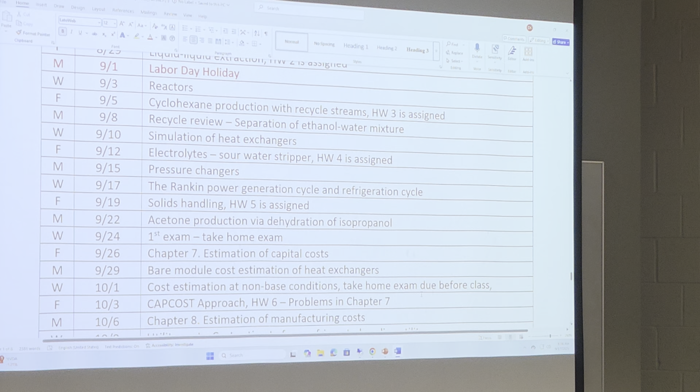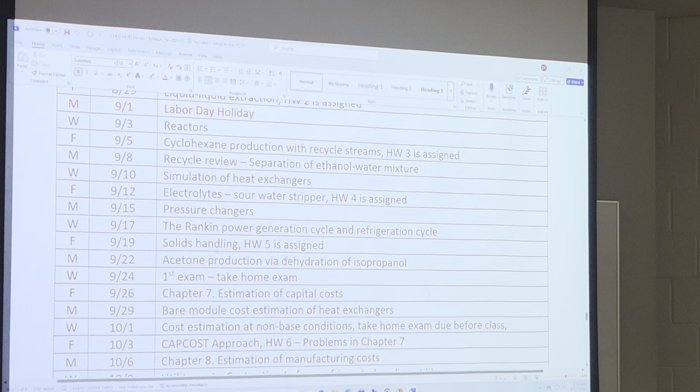Any questions? No? Let's look at our syllabus schedule. Tentative lecture schedule. September 17th, we talk about Rankine power generation cycle and refrigeration cycle. And then Friday, solids handling. And homework 5 is assigned for Friday. I'll give you some updates on homework.

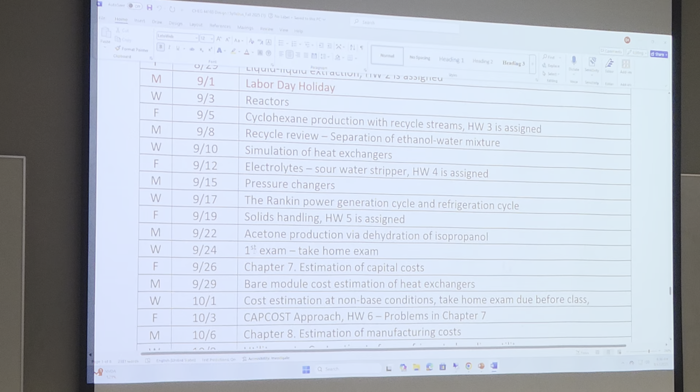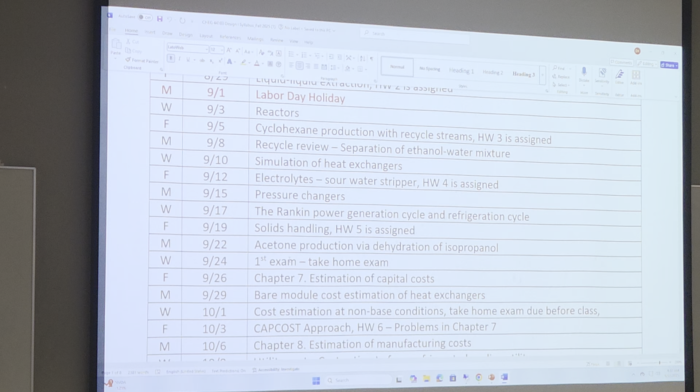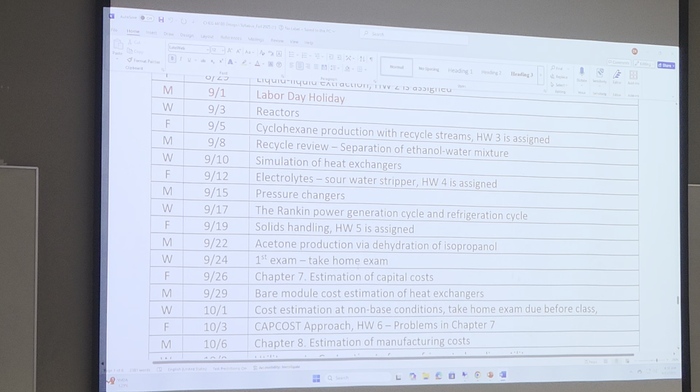Why? You can see our first exam starts next Wednesday. Yes, 1 week from today. Exciting. Very interesting homework recently, but it's time consuming, very time intensive. As you can see, you will be given a 1 week take-home exam. So it starts from next Wednesday, you will be given 1 week to submit. Yes, there will be 7 questions.

But how nice I am. I will show you 1 exam question next Monday. So next Monday, what I show you is exactly that 1 exam question. You know how nice that is, huh? So what do you think? It means you better finish the homework earlier, before that Monday lecture time. Even though homework is already available, Friday I'll give you more information about the homework. Just finish it during that weekend, and then next Monday when I show you 1 exam question, you can finish that 1 question.

But the official exam starts next Wednesday. Only 1 rule for that take-home exam: you cannot discuss with anyone, each other, including me. You can ask me general questions, but not technical questions. You do all by yourself. Is it clear? Don't talk to anyone, don't discuss anything about Aspen, about this class. Do all by yourself, as much as you can, and submit it through Blackboard, same as homework. We'll talk about details next Wednesday, but that's our scheduling.

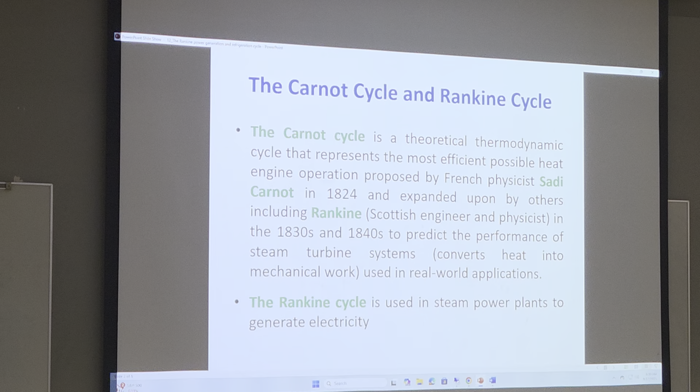Let's talk about Rankine power generation cycle and the refrigeration cycle. You have heard about the Carnot cycle, yes? What is the Carnot cycle? There's no change in entropy in it. It's a reversible cycle, isn't it? It's the most efficient, no energy loss. Okay, good. What else? Most efficient heat cycle, steam engine. Yeah, kind of. Most efficient steam engine cycle.

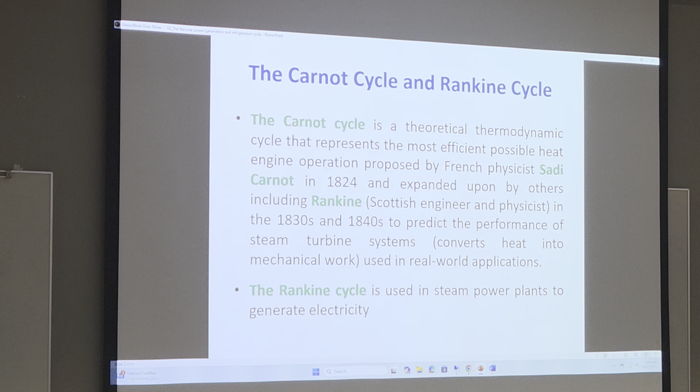From this Carnot cycle, simply the industrial revolution started. Steam engines for train transportation; we developed coal-fired and natural gas-fired power plants, all based on the Carnot cycle. Carnot is a person's name, a French engineer and physicist, Sadi Carnot. In 1824, he proposed and published that idea. But in the 1830s and 1840s, the Scottish engineer and physicist William Rankine expanded Carnot's idea to complete the power generation cycle. So we call it the Rankine cycle.

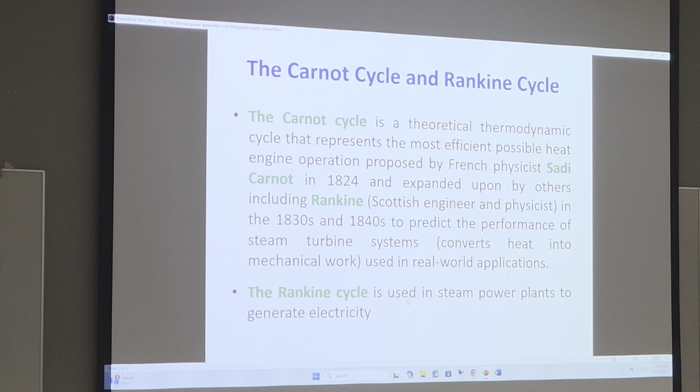So who should get more credit for this idea? In my opinion, Carnot should get more credit, since whoever invented it first should get more credit, but Rankine expanded and completed that theory. This theory predicts the performance of a steam turbine system, converting heat into mechanical work, to generate electricity or run our steam engine. The Rankine cycle is used in steam power plants to generate electricity. Carnot cycle, Rankine cycle. Amazing topic.

If you look at this Rankine power generation cycle, we have pump, boiler, turbine, condenser. It's a closed system, not open. As long as we input some water, in this case 10,000 kilograms per hour, this water will continuously circulate in this closed system and generate electricity. Somebody says we don't lose anything. Yes. Somebody says it's a very efficient power generation cycle. Yes.

Next slide, amazing. Exactly the same concept, and engineers developed this idea for the refrigeration cycle. We use compressor, condenser, valve, evaporator. It's also a closed system. We just replace water with a refrigerant, ammonia in this case, or propane gas, like used in forklifts. Nowadays, hydrocarbons, CO2, dimethyl ether, CFC, HCFC refrigerants. Only replacing water with refrigerant, we can develop a refrigeration cycle.

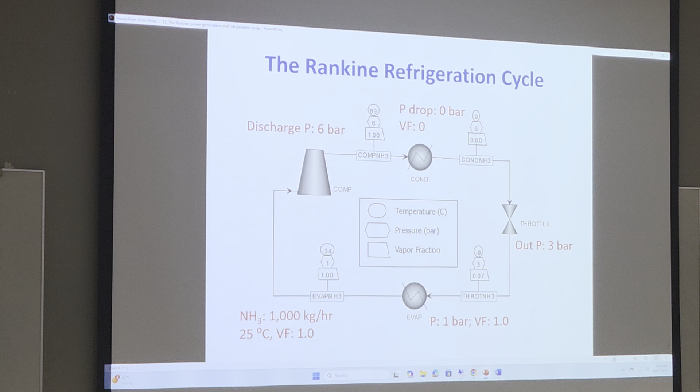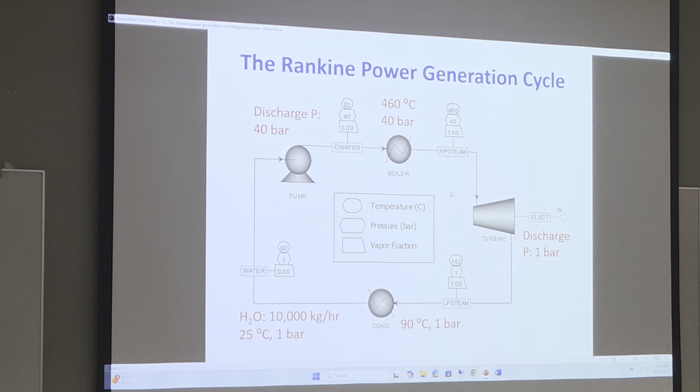Imagine how much the Rankine or Carnot cycle and refrigeration cycle contributed to our daily life. Think about your refrigerator; how could you survive nowadays? A huge contribution to human daily life. As I mentioned, from the Carnot and Rankine cycles, the industrial revolution started and bloomed. Anyway, let's design the Rankine power generation cycle first, using Aspen.

For water, if you go to the method assistant, it recommends using a steam table. So I can choose IAPWS-95, International Association for the Properties of Water and Steam. That's the most recent steam table. We have only one component, so don't worry about binary interaction parameters. We will have a warning that says binary parameters are missing. We only use one component, so it's okay.

As you know, we have one pump, and we have a boiler and condenser, and then we have a turbine. Turbine is under pressure changers. Let me rotate this icon so that I can connect streams well. So let's try to connect streams.

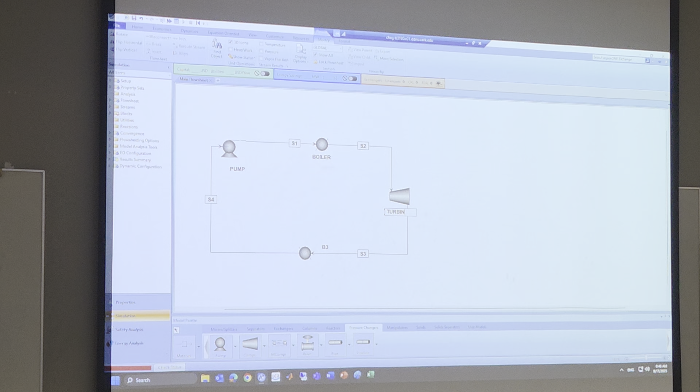Okay, let's name it. This one is pump. This one boiler. This one turbine. The turbine is for what? To generate electricity. So I will connect a work stream to generate electricity. So we generate electricity.

Let's name this stream cold water. This one high pressure steam, low pressure steam, and this one just water. Okay? Let's input our initial water flow. So you go here, 25 degrees Celsius, 1 bar, and then water mass flow is given. So I will put water 10,000 kilograms per hour.

We are working on the boiler. If you look at the slide, boiler temperature 460, pressure 40 bar. It's all given, so we'll put it in. I am working on the condenser, 90 degrees Celsius, 1 bar. Let's go. We are working on the pump. Discharge pressure is given, 40 bar. Efficiency is not given, just leave it.

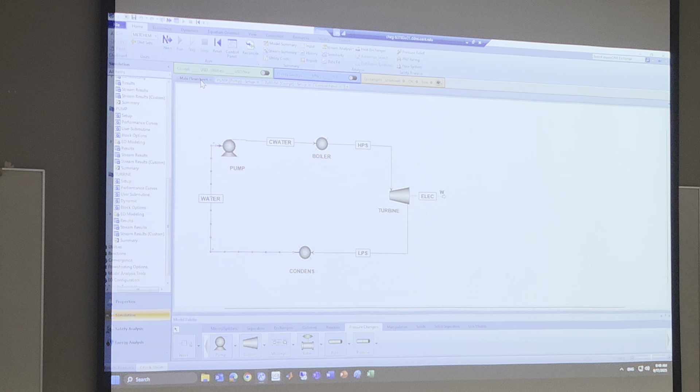Okay. So our simulation is done. Let's look at temperature, pressure, vapor fraction. So we will pay attention here. Initial water was about 90 degrees Celsius, 1 bar, and the vapor fraction is 0 because water is liquid. We pumped to 40 bar, high pressure, and we produce high pressure steam using the boiler. At that time, the temperature is 460, 40 bar. We produced high pressure steam, so vapor fraction is equal to 1.

We use this high pressure steam to generate electricity through the turbine. So let's look at how much electricity is generated. How much electricity? What do you see? Ryan, can you see? Negative 1,630 kilowatts. So what does negative mean there?

Leaving? In this case, leaving is not a good word to express this one. Being used? I don't think so. Paige was smiling. I was just laughing. Oh, Harrison. What does negative mean in this case? Jackson, can you help me? Is it the maximum?

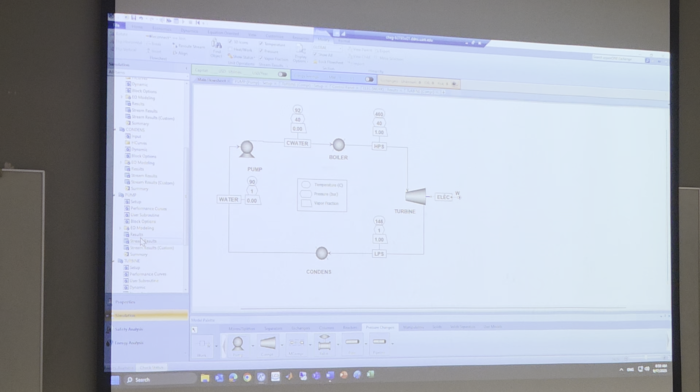But anyway, what are we talking about here? We used 10,000 kilograms per hour of water. We can generate about 1,630 kilowatt of electricity, more than one or two residential houses. Now, if you look at here, we used a pump. So let's look at how much energy is required for the pump and boiler. After you run the simulation, you can check how much power is required for the pump. It's about 26 kilowatt to pump 10,000 kilogram per hour of water.

Now we can check the boiler, how much heat is required. As you can see, heat is given in gigajoule per hour. About 30 gigajoule per hour of heat is required in that boiler. Boiler means we use steam or burn natural gas to boil the water to produce high pressure steam. Now check the condenser. In this case there is a negative value for heat; the heat is extracted from the condenser. It's about 24 gigajoule per hour of heat extracted.

You get some idea now what's going on? Now, the question here. Look at the cycle. We pump water. We boil that water, produce high pressure steam, generate electricity. We still have low pressure steam. But we condense it to water and pump, boil again, produce electricity, and condense water again. Pump, boil, produce electricity, and condense water again.

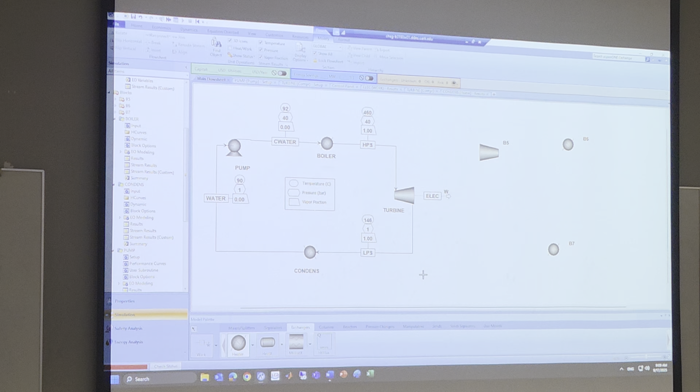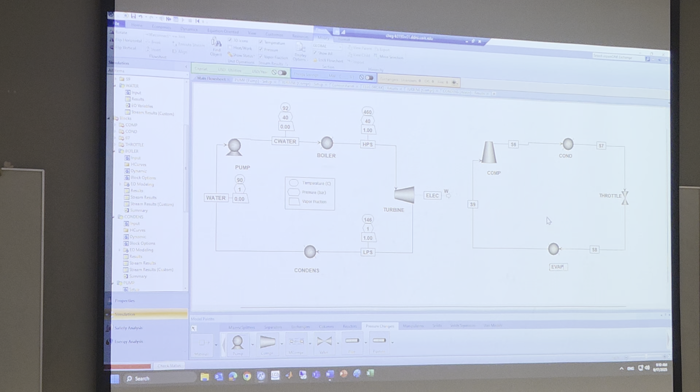So in this case, we have a compressor, and we have a condenser, evaporator, and a throttling valve. So I will choose this one. Let's rotate the icon. Let's connect material flow. In this case, compressor. Condenser. Valve and evaporator. We use ammonia, so I will name it compressed ammonia, condensed ammonia, throttle ammonia.

We use ammonia, so we need to specify a component, ammonia. So let's go back to the property window. I will put ammonia. And we don't know what property method to use. So let's go for now. Run the simulation. Now, if I run this simulation, what do you expect? We didn't put any information yet, so let's go to the compressor.

Okay, isentropic, discharge 6 bar. Let's continue. I am working on the condenser. This information is all given: pressure drop is given, and the vapor fraction is given. So the vapor fraction is equal to 0, pressure drop is equal to 0. Let's continue. I am working on the evaporator. Pressure is given, 1 bar, and vapor fraction is given. So I will choose vapor fraction is 1. And let's continue. Throttle outlet pressure is 3 bar.

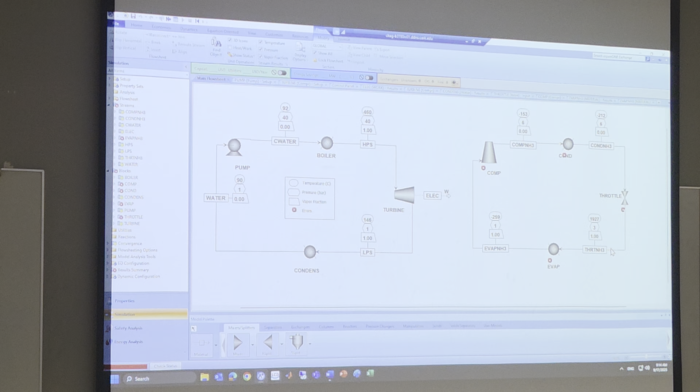Select that flow sheet, right click on any unit block, and you can change the section and define a new section. I define S1. Select your second flow sheet, right click on any unit block, and for change section, create new section S2. So we have 2 different sections. We can specify 2 different property methods. For this one, maybe steam table. For this one, an equation of state-based property method. But how do we do it?

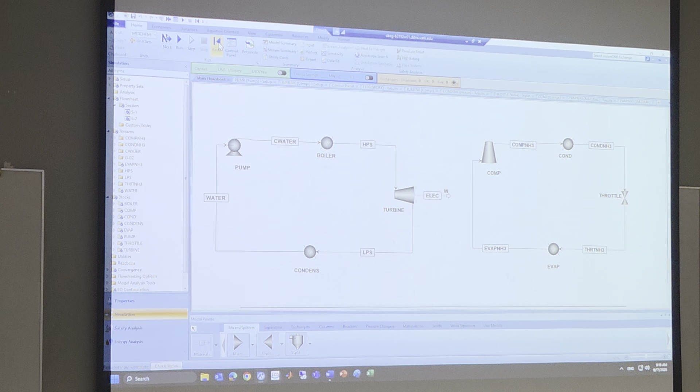If you go to the property window, under the methods folder, then the flow sheet section tab, you can choose S1, steam table, and S2, what the method assistant recommends, refrigerant property, so the REFPROP property method. Okay? And for this simulation, let me just reset just in case, to reinitiate the calculation. Now we can run 2 different processes in one main flow sheet. We are not using global anymore, so right click and you can delete global. So we got no warning, no error.

Okay. Now what we are interested in, if you look here, this is the refrigeration cycle. So please look at the temperature profile in this case. Right now, after the throttle valve, the temperature is 9 degrees Celsius. And after the evaporator, the temperature is negative 34 degrees Celsius. By using 1,000 kilograms per hour of ammonia, very similar to the power generation cycle, we could produce this refrigeration cycle.

The amazing thing here, if you look at your home refrigerator, how do we control the temperature? If you just change that pressure, let's say initially 3 bar, change it to 5 bar, we can easily control the refrigerator temperature. What do you see now? 4 degrees Celsius. Yes, it's about 39 degrees Fahrenheit. Your refrigerator temperature. You can easily change that pressure and control the output temperature of the refrigeration cycle. Initially it was negative 34, now it's negative 19. Your freezer temperature.

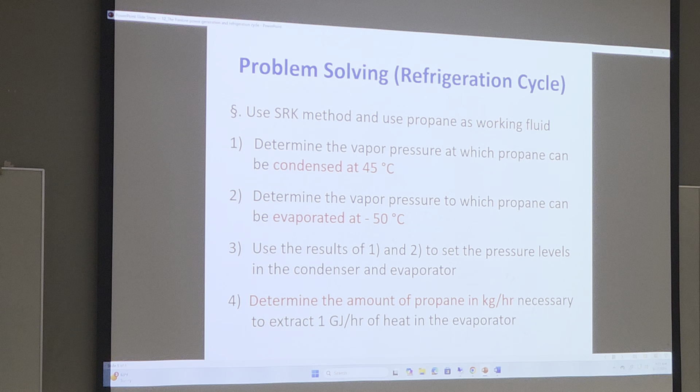You got the idea of those questions? Yes? Let's try to solve the first question. It says, determine the vapor pressure. What do we use? In this case, we use propane. So let's define propane. Okay, and it says to use the SRK method, so we use the SRK method. Now the first question was determine the vapor pressure at which propane can be condensed at 45 degrees Celsius. What does that mean? You can use this analysis. It's called property. Vapor pressure. If you hover your mouse on PL, vapor pressure for pure component. Unit, maybe we can choose bar.

Determine the vapor pressure of propane at 45 degrees Celsius, which can be condensed at that temperature. So I choose 45 degrees Celsius. We are working on propane. We use the SRK method, run the analysis. Then check. We get 15.5011 bar. At that temperature, 45 degrees Celsius, at this pressure, propane can be condensed. That means propane changes from vapor phase to liquid phase. We are going to use this information for refrigeration cycle design later.

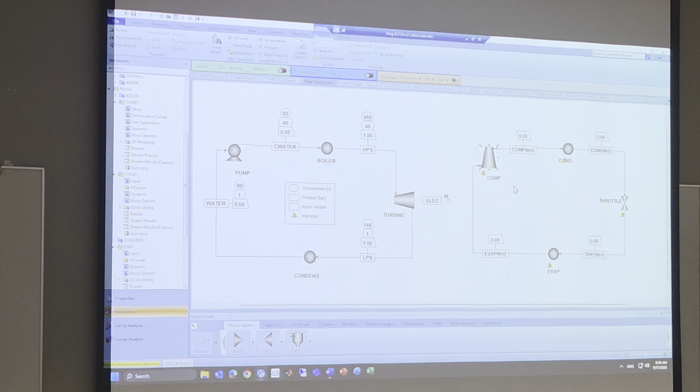But anyway, what this question is looking for is how much heat is extracted in this evaporator. So let's look at the evaporator. Oh my goodness, it did not work. The reason is I didn't change the input stream. Okay, we are using propane here. Let's say the initial gas was 3,000 kilograms per hour. What? Oh my goodness. I'm sorry. But please be patient.

So what's the question here? How much heat is extracted from the evaporator? So let's look at the evaporator. You can see, using 3,000 kilograms per hour of propane gas, the heat duty is about 0.527. We are looking for this to be 1 gigajoule per hour. You can use a design spec to find out how much propane is necessary to extract 1 gigajoule per hour.

Any questions? No? Let me make sure. Jacob, Nadia.